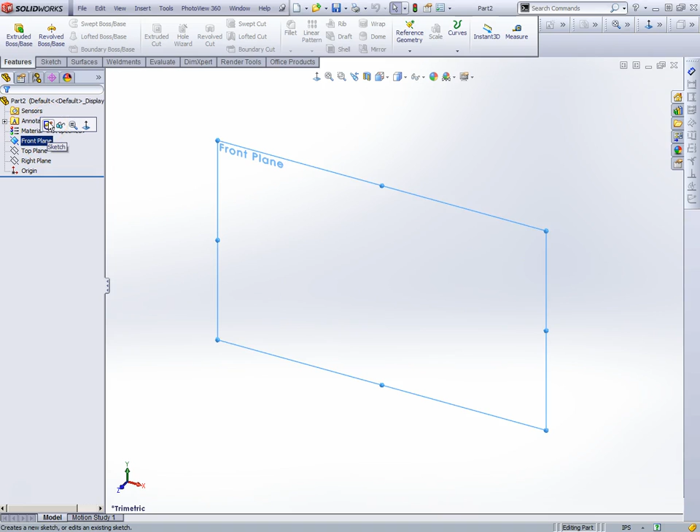And I'll go for a simple rectangle, middle here, pull it out. I'll make this 2 by 3. I just typed in a 2 and a 3 there. Hit enter, exit the sketch. Let's go ahead and extrude the boss. You guys have all done this a lot, so we're just kind of flipping through this here. I'll make that a 1/2 inch.

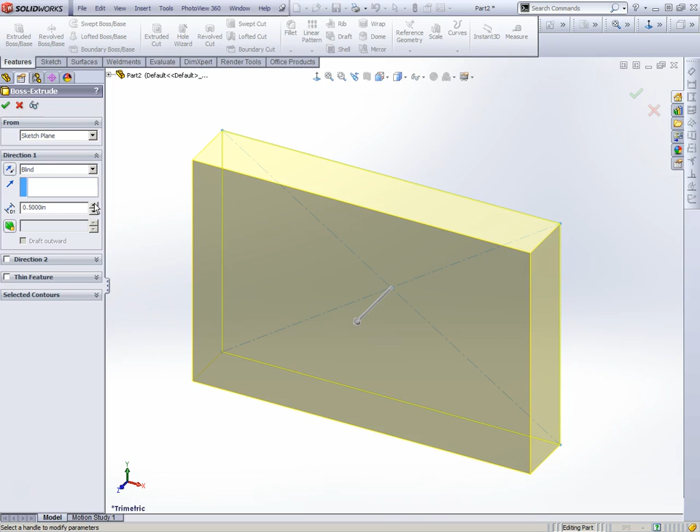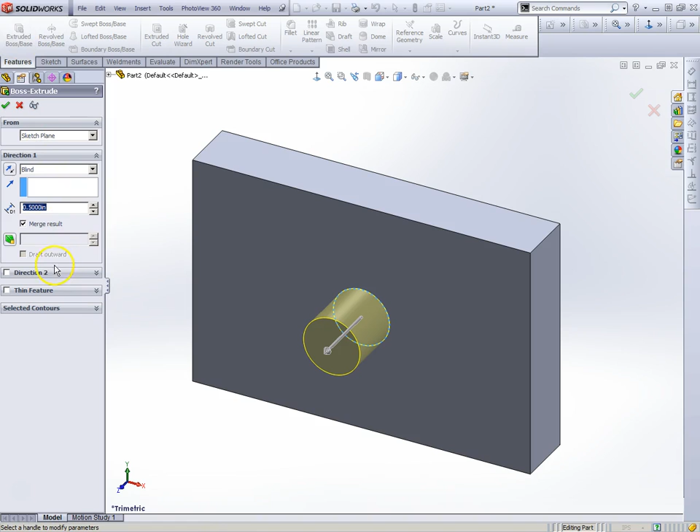And to make the part more interesting on the face here, I'm going to do another sketch. And we're going to do something simple like a motor shaft kind of a looking thing. I'm going to just type 0.500, enter. And as you might guess, I'm going to immediately go back and extrude that, and I'll leave it at a 1/2 inch. Kind of gives it some kind of a meaning to it.

And we're going to save that as, let's see, let's go to SolidWorks files here and find the ECM110 directory. And you can see I've got my fun stuff here, so we'll just go to the 2015-16 year, and I'll make up a new folder. And we're just going to call it build in space demo. Okay, so we're going to build in space demo here and save this off as, I will call it motor 1. And I'm just going to save that. Okay, so now I have a part.

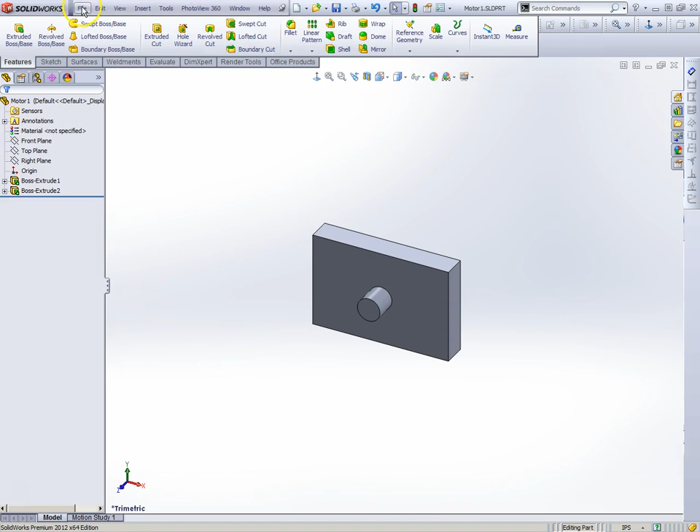And now we're going to be leaving the land of parts. We've been doing a lot of part stuff. So now we're going to go over to the land of new here and go to the land of assembly. Okay, so it's different in assembly because we are going to be kind of doing things that are like pieces of both, but you're going to have to be very careful as we move back and forth between layout and part and sketch. Okay, so what I'm going to do is I'm just going to go ahead and make this easy. The assembly is already knowing that I have one of these, but I'm just going to X out of that.

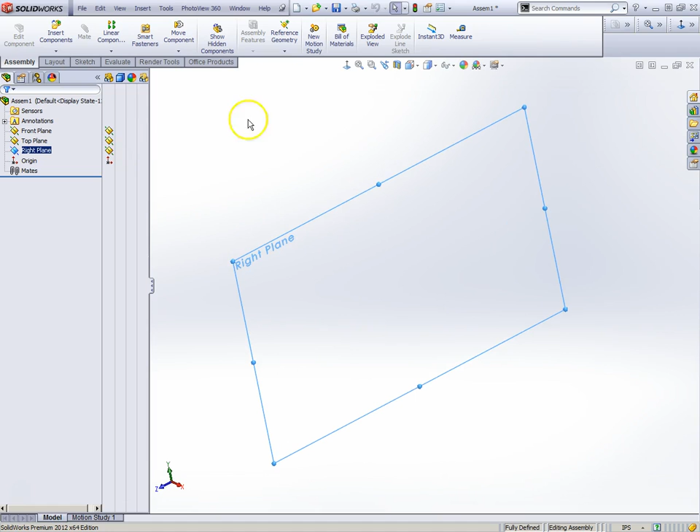And I'm going to go over these planes a little bit, and we're going to do this little thing right here. You see this little pull out here? That changes things because now I can turn all these things on, and I know they're all on, okay? And the advantage is that I can see these different planes. Now, if I go up to here and I hit View, and I say Planes, it's going to show me all of them. I believe I can toggle this off and just have the plane that's highlighted. Okay, so a lot of times people do this, they turn them all on, it says, I can't see all of them. Well, just go to View, hit Planes, and now all the planes are here.

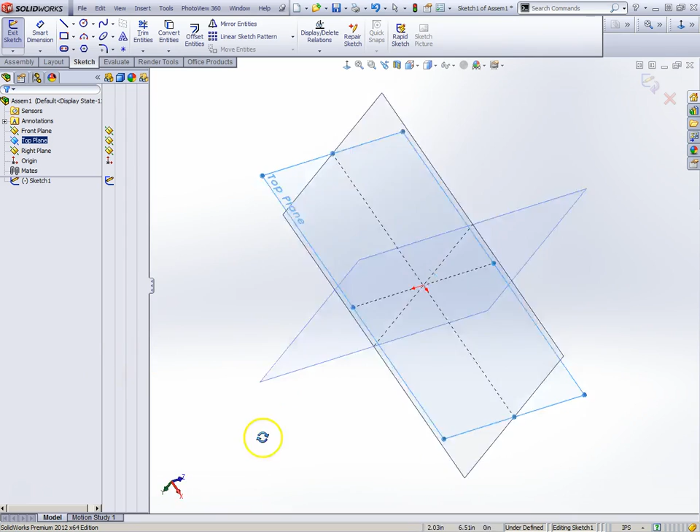Now, there's all kinds of ways that people come up with the version of how they want to do these. A lot of times I like to use the front and the right plane when I do this kind of stuff. So I just get used to having that kind of orientation. Kind of use the right plane as the end of my thing, and the front plane is sort of the silhouette outline of my thing. My top plane will be used for reference for doing various things later.

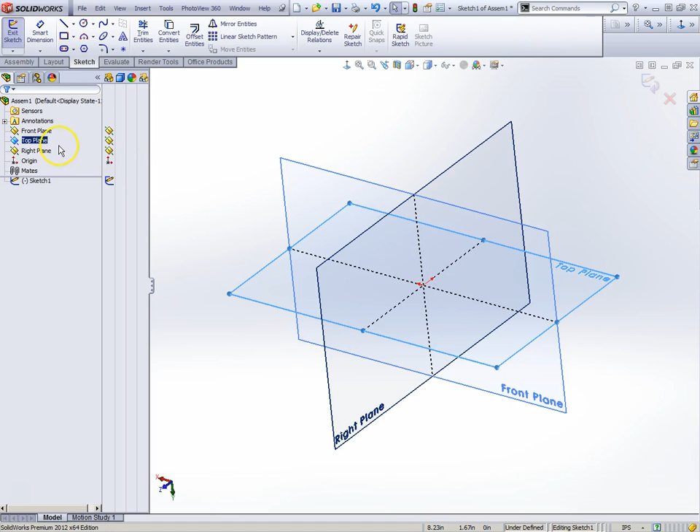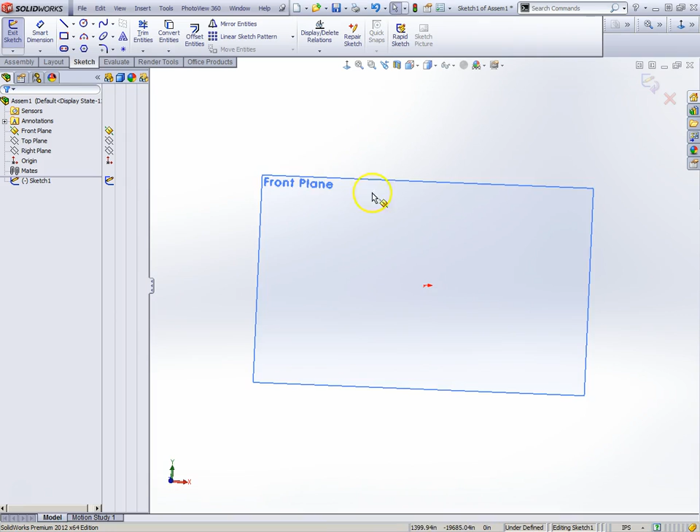But what we're going to start with is I have all these turned on right now. I'm just going to use the front plane as a base frame to work from. And so I'm going to turn off the other two here. And as you can see, I'm just down on my front plane. And I'll flip it around here because I'm going to try to get this in some kind of, hang on here, X, Y. Yeah, there's X, Y right there. So let's flip it around that way. Okay. So right now, X is to my right, Y is up and down.

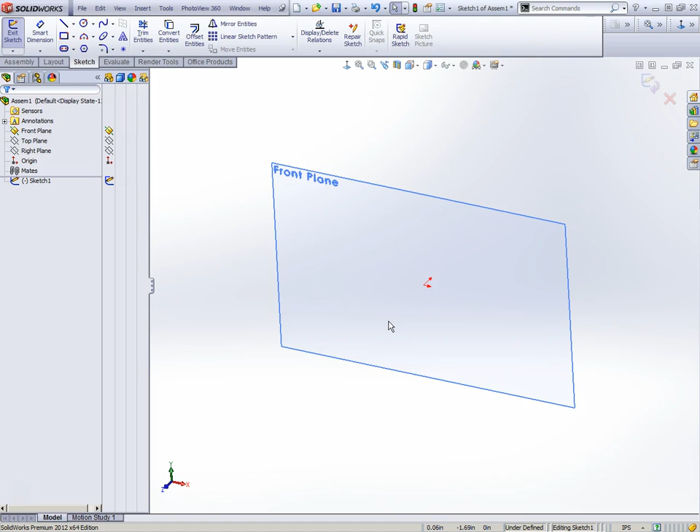It's not really important, but it's just handy if you like to play with X and Y. And so what I want to do is I need to add, I've got to create a space to start hanging things on. Okay. And so first I'm going to exit this sketch that got started there.

And right now I just have a front plane, and I'm going to go to reference geometry. And you see plane. And now it's going to ask me for a reference. So I'm going to go ahead and click the front plane here if it lets me click it. There you go. And I can now pull this out. Hang on. Oops. Let's do that one more time. I'm just going to click the front plane here.

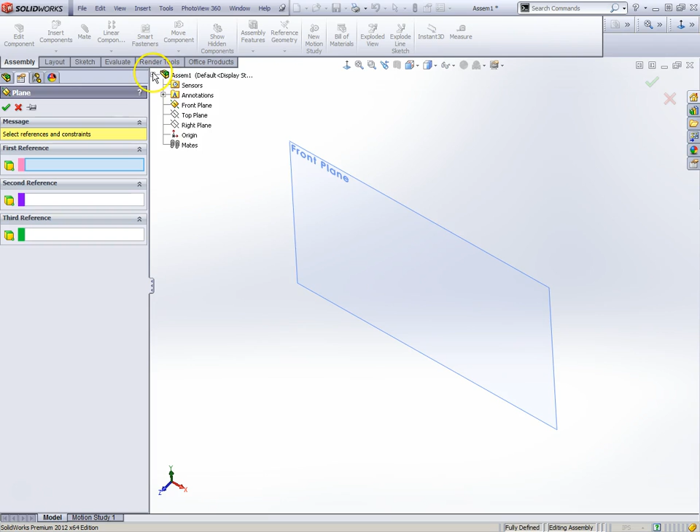And I'm going to say I want a plane. It's referencing the front plane, and I'm going to come out 2 inches. Okay. So now I'm out here 2 inches, and I can say, okay, I like that plane. And so now I have this plane. This is going to be the beginning of where I want to put something, where I want to start out with my first component in space.

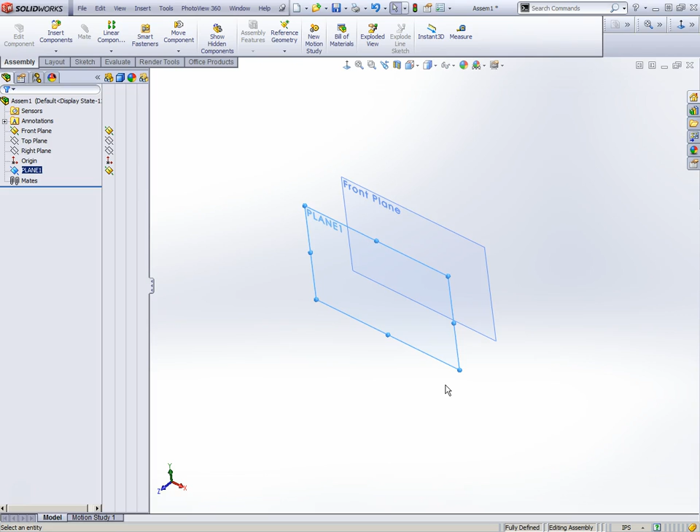Okay. I'm going to turn on the right plane here too, just so we have an idea where everything's going. So you can see I have the front plane, which is already there. I added my new plane, which is this one. And I'm going to just sit on top of this for a second, and you'll notice that if I hover over it, it'll let me change the name of that.

And so I'm going to call that the ear plane, no pun intended. I'll just go ahead and do it in uppers and lowers so it looks like the other labeling. And now you notice over here it says ear plane. Now the reason for that is I need to have some ideas of where I'm going to be putting stuff.

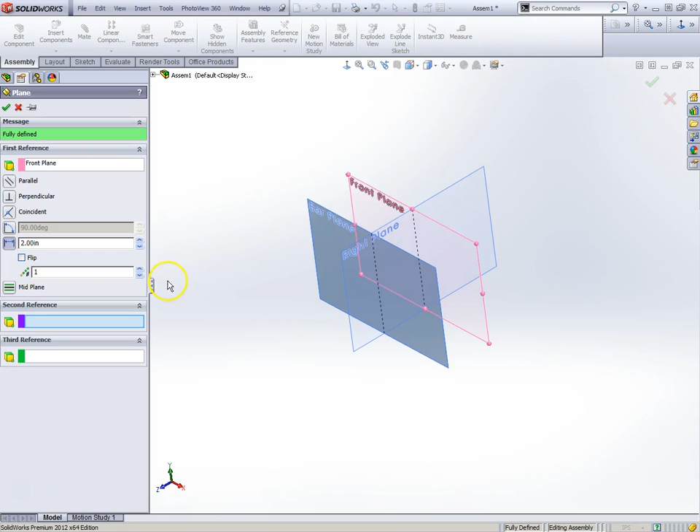So now I'm going to add another plane, same thing, just insert a plane. I'll still use the front plane as a reference, okay? And this one we're going to move out to 3 inches. And now I have a 3-inch plane. Now I'm going to label this one the leg plane. And so now I have the ear plane and the leg plane. I have control over turning these off and on, so I can cut my confusion levels down pretty quickly.

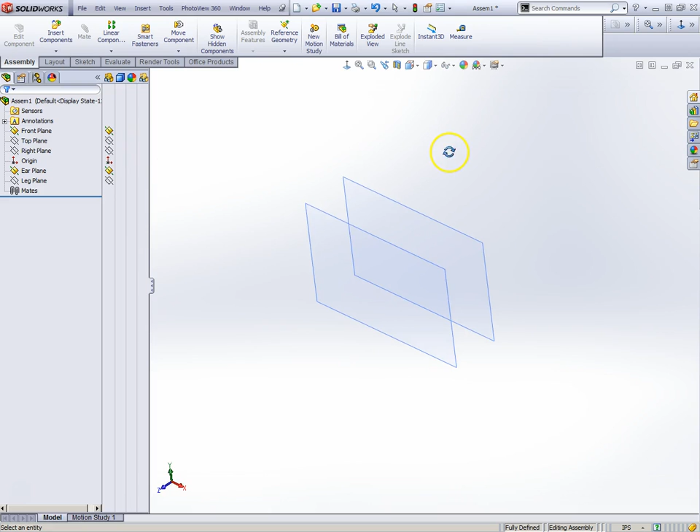I'm going to start by turning off the leg plane, and I'll turn off the right plane here too, so we just see our one plane. I'm going to leave the front plane in the background here. Now I'm going to go to insert up here, and it's going to say component. And remember the motor we just made? I'm going to say existing part. I only have one part in that directory, but I could have hundreds in there. And you'll notice it brought it over here.

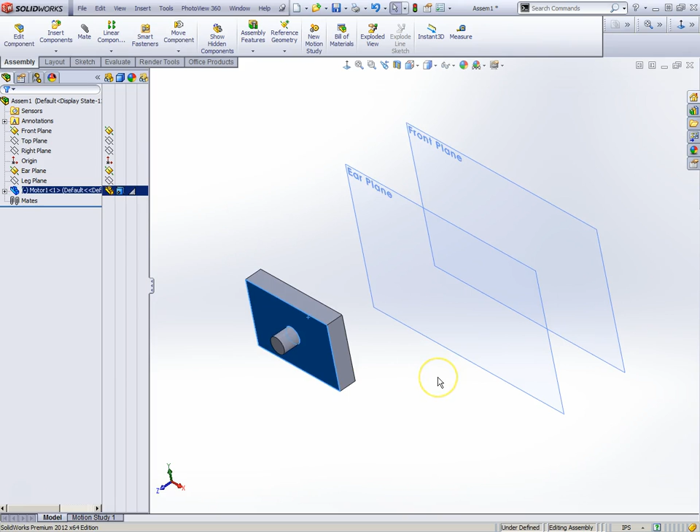We're going to click on this thing, then right click, and you see the word float? It's pretty important we click that, so now we can move this thing around. Otherwise it'll be fixed in space and it won't go anywhere. You don't do this too often, so we're going to go through this. You're used to doing mates between parts, but now we're going to do mates between planes. And that's a really big difference from what we've been doing.

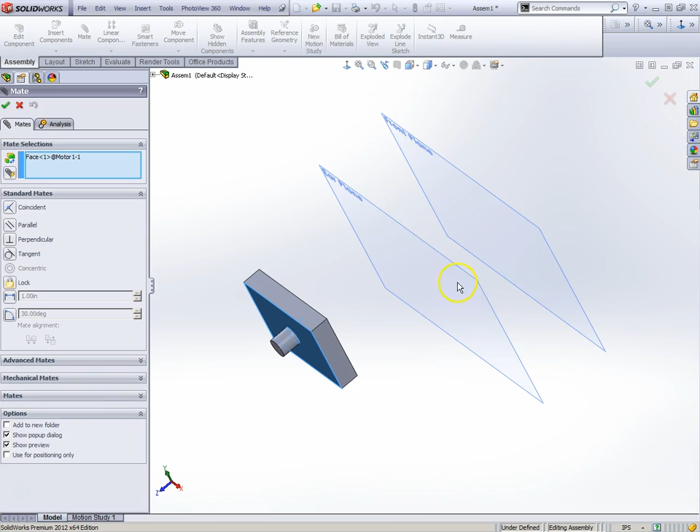And the reason for this is that we're trying to put stuff in space where we want it. I've already designated the ear plane as how many inches away from the front plane I want to be. So I'm just going to hit mate. Let me right click and clear whatever's in here. And we'll click the ear plane, and I'm going to click the back of the motor. Poof! Now it's on the ear plane, and that's pretty cool.

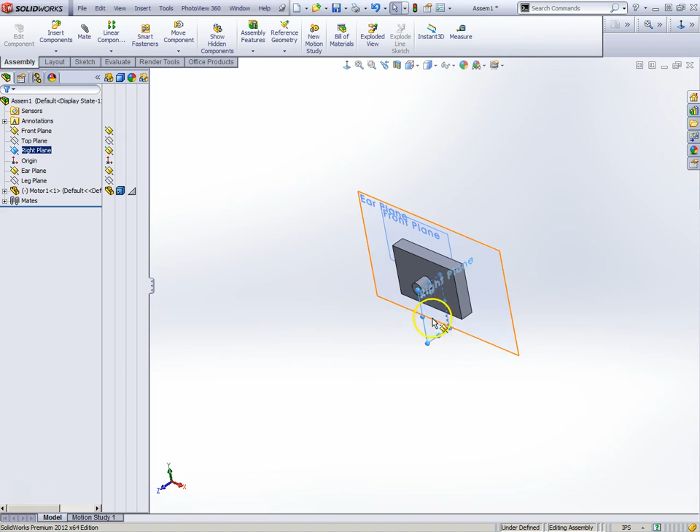But that's not doing us much good because you can see I can move it all over that plane. So just for another reference, let's get the right plane going. Okay, and there's the right plane hanging out. And I'll go ahead and move this part over here real quick.

And what I'm going to do is I'm going to do a mate here between the front of this motor. I don't think I got that. Hang on. If you don't see the part light up pretty well, just kind of zoom in a little bit. Make sure you get the plane you want. And we'll do the right plane. Okay. And notice I'm still going up and down, but I can't go left and right.

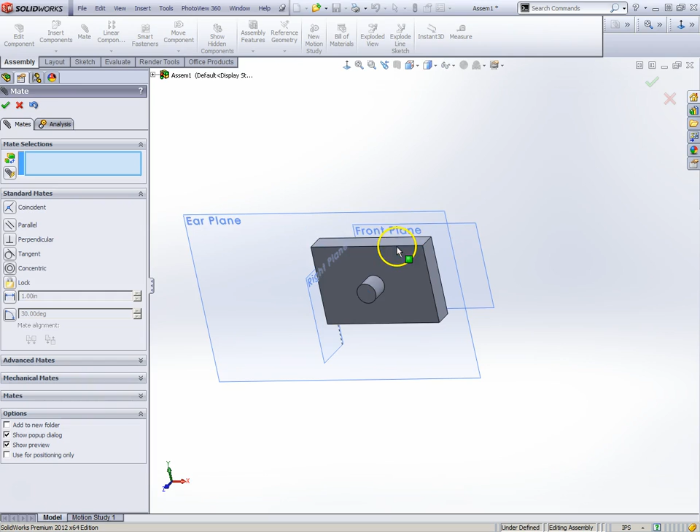So which would you think I would turn on next? How about the top plane? Let's turn that on. Leave all those guys on. And now I got the top plane here. And remember planes, once you click on them, you get these little blue dots. So if you want to, you can make them a little bit bigger to give yourself a better idea how they work.

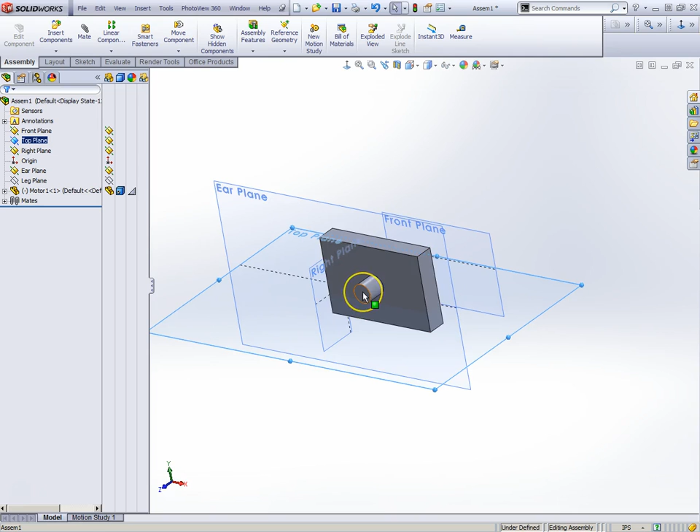And I'm going to say, this is going to be the shaft of my rotate-my-ears-around motor. So I'm going to put a mate on this, and I'm going to go from this plane here, the top plane, and I'm going to go underneath to the part and do that. And you'll notice it's already going up. And I'm going to go over here to the distance, and I'm going to put that at 3 inches above.

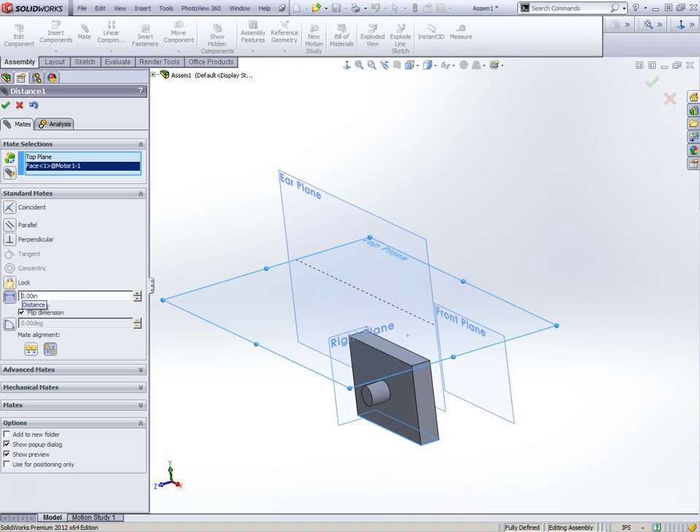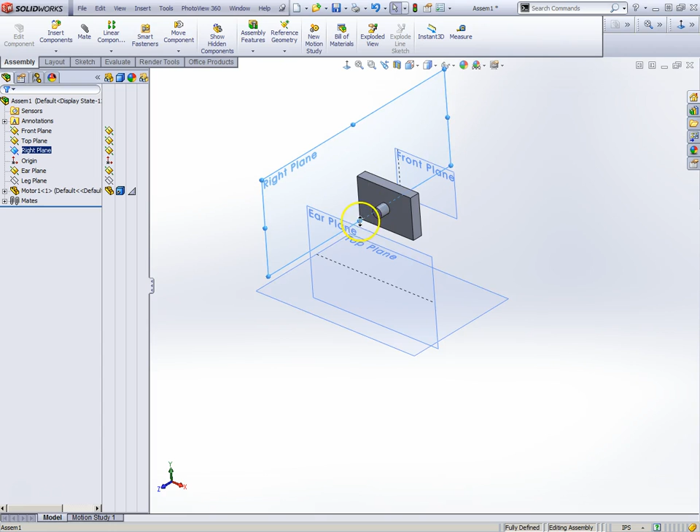Okay, now if you notice it went the wrong way, all I got to do is hit the flip dimension here. You'll see it goes up. So I just moved this thing around, and it's all based on planes. So I'm going to make these planes a little bigger now so you can see this a little more clearly. Because what we did is we said we want the part on our ear plane, okay? And you'll notice that it's stuck to the ear plane.

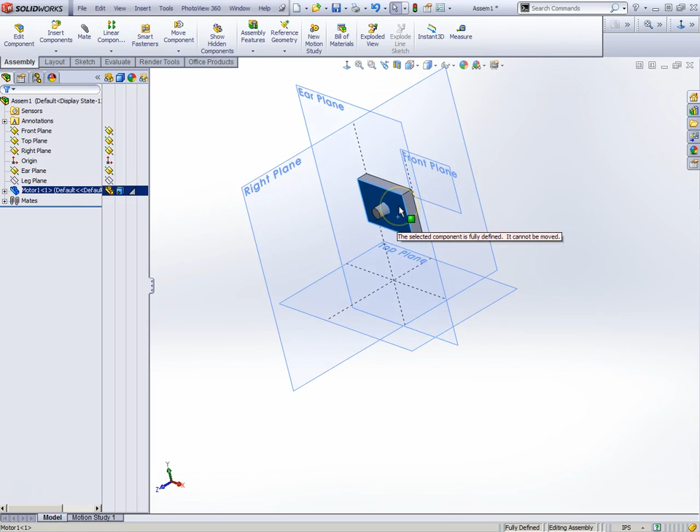Then we referenced this edge, the other side of this motor, to the right plane, which is a fixed plane in space. And we also referenced it to the top plane, and now I can't move it. It says the component is fully defined, it cannot be moved. And that's where you want to start out, because that now anchors a lot of the work you're about to do. You're going to be doing a lot of other things here.

And so I'm just going to stretch these planes out once more. And notice I left that front plane just kind of drifting in the background. We'll just let that sit back there and not worry about it. And remember I had another plane called the leg plane? Well, let's go ahead and turn that one on. So here's the leg plane. I can turn that one on now. Okay.

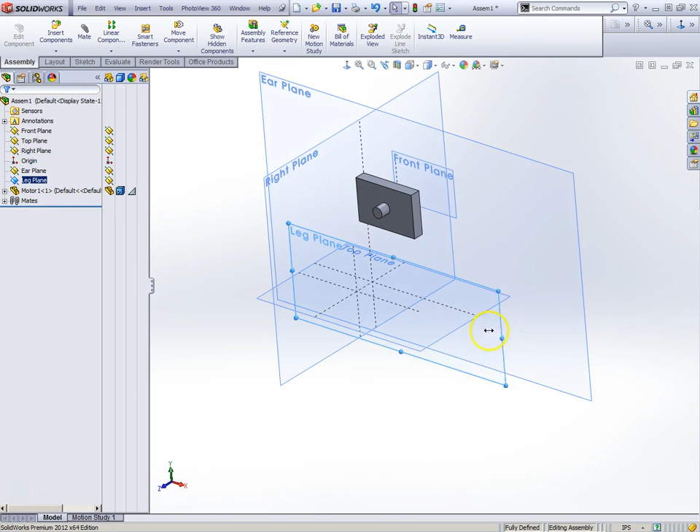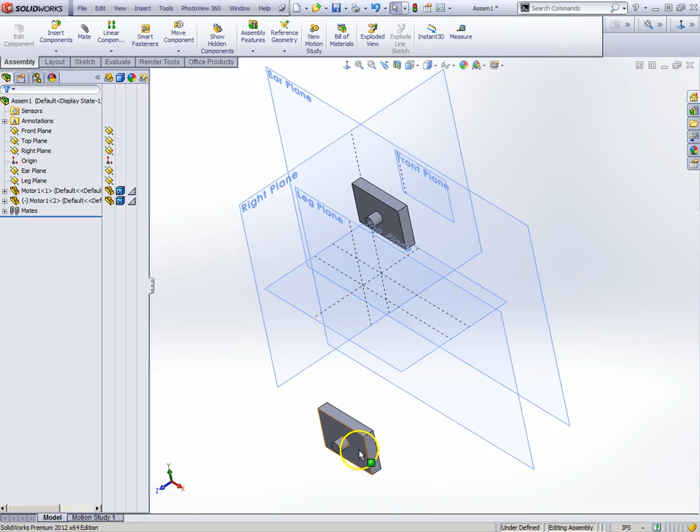And we're going to put a motor on that one. And so I have to do what? Insert, component. Have I already made this component? Yes, existing part. Now click that, and ta-da, it's over here. Now, if I click on the part and I right-click it, it says I can fix it. So it means right now it is a floating part, which is great. You always have to double check that, because if all of a sudden you can't move something, it probably means it has already been anchored on you.

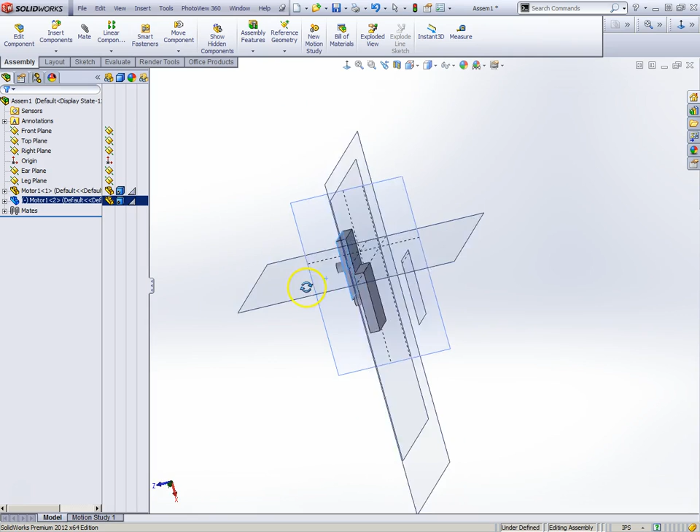I'm looking at the planes here, and I'm thinking that ear plane is a little further away from the middle than I want. So let's fix that first. When I look at the top here, you see that ear, here's the middle, which is going to be the middle of our system. And I put this over here, and I don't have a lot of distance between the ear plane and the leg plane. So I'm going to go back to the ear plane.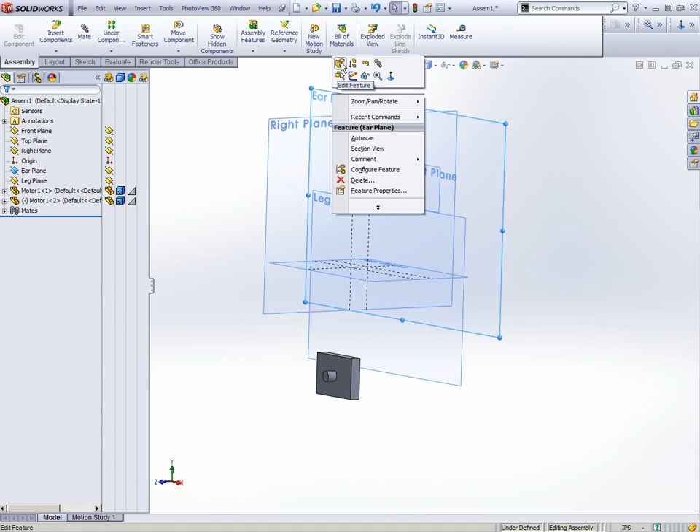And if I right click, you'll notice it lets me edit the feature. Okay? Planes are just like objects. You can handle them the same way. And notice what I'm going to do here. I want that a little closer, so I'm going to make it 1.5 inches. And ta-da! Now I got more space between them. So you can click on planes, and you can edit their features all kinds of ways.

You get in trouble if you start playing with planes after they've been used in a build. In other words, as you keep building the part, you'll have a lot of problems on a rebuild. So pay attention to getting your planes where you want them to start out, because later on they can be a bit problematic to fix.

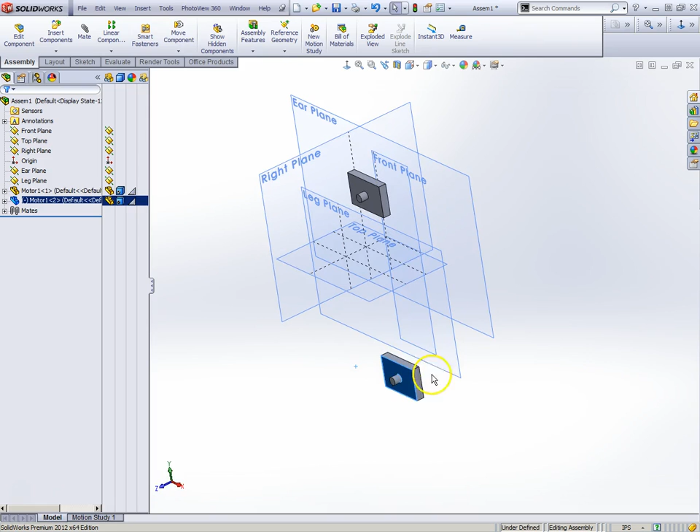Not unfixable, but definitely you will be breaking down a lot of stuff, going backward and then resetting and then putting a lot of parts back. Okay, so let's get back to our motor I got floating here. Okay, and it's just floating. So first thing I'm going to do is what? I want to put it on, this is going to be my leg motor.

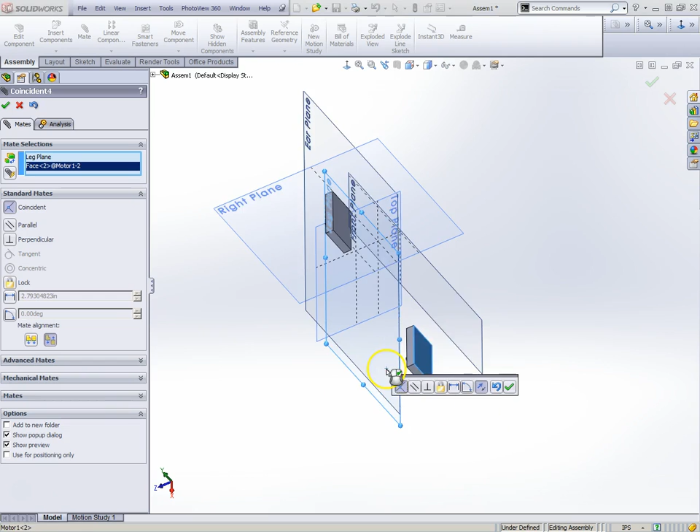So I'm going to ask for mates. And notice it's picked something, and that's always the first thing I do. Go over here to the mate and just say clear selections. And I'm going to go to the leg plane. Okay, and I just highlight it there. It says leg plane. And what do you think I'm going to click? Back of the motor. Poof. Now it's on the leg plane. But notice that it can move anywhere it wants on the leg plane, right?

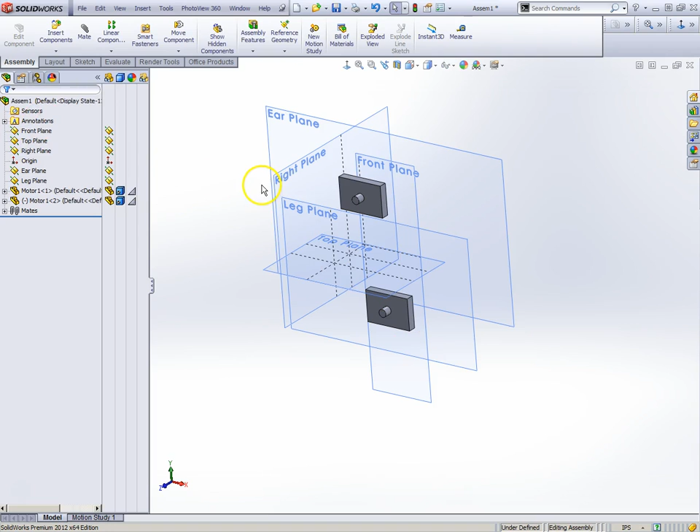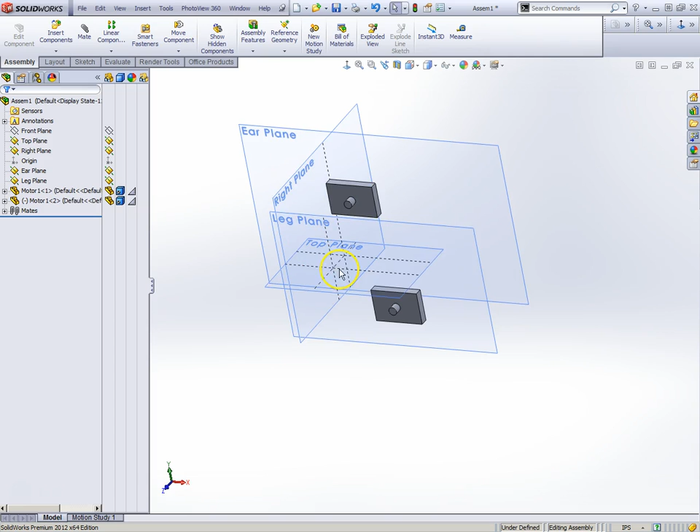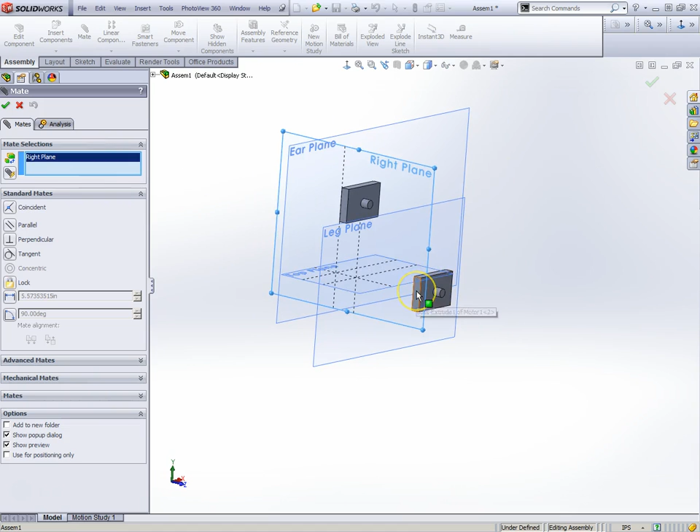So what I'm going to do is I'm going to go ahead and anchor this thing in space so it doesn't drift around. And I'm going to use the mate. And I'm going to pick the right plane so I have a common reference. Oops, it's got too many things that I already had picked, so just clear them out, pick the right plane. And now I'm going to click that edge of that motor box. And I'm going to say, since I'm designing this thing, I would like to have that motor 6 inches from the front. And I could hit fine with that.

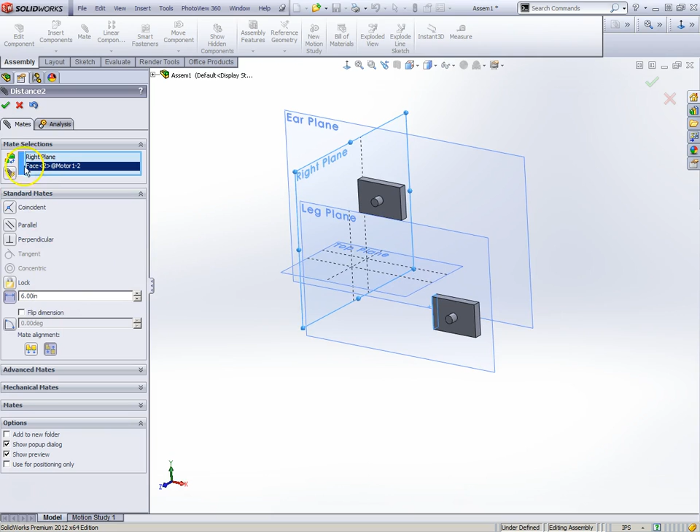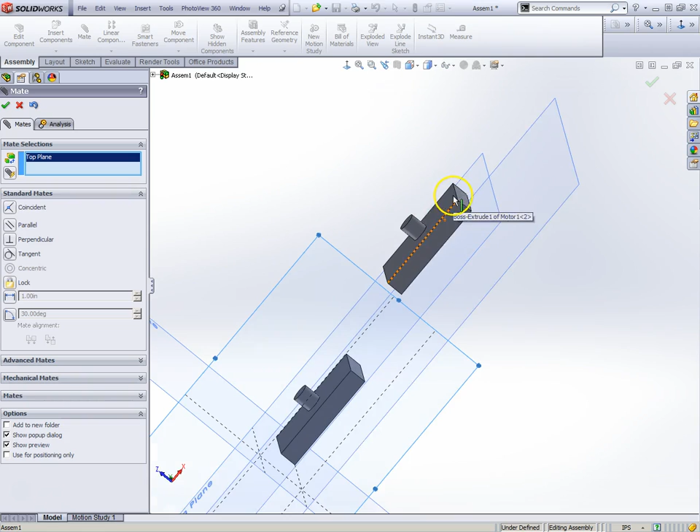And now there's one more problem. I could still go up and down. I could register this all kinds of ways. I can come off the other motor, or I can come off the top plane. Let's use the top plane for right now. Pick the top plane. Pick the bottom of the motor, and it's having a little bit of trouble, so just zoom in. There you go. Got the face of that. I'm already working on this part, so I gotta hit that. It's going the wrong direction, so I hit flip dimension. Up I go. I'll just set it up to about 1 inch here. I'll just type it in 1.0.

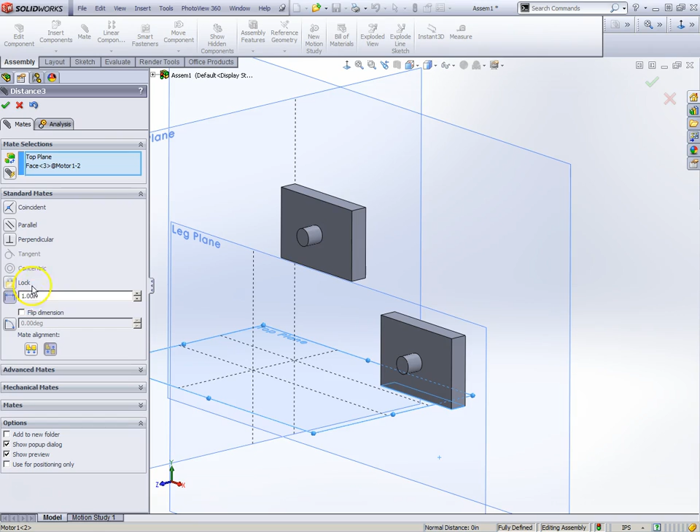And if we try to move the part, what do you think is going to happen? Nothing. It says the selected component is fully defined and it cannot be moved. Now notice how these parts are hanging in space right now. They are well defined. I can not move either of them. They're all set up to where I want them to be. And since I have them where I want them, we need to create a frame. I want to hold these together. Obviously this is neat that they're all locked in my SolidWorks model, but I need the parts to hold these things in place. And now we're going to hit a whole bunch of new stuff. So let's just get ready to do that.

All right, so what we have to think about is you're used to making parts by saying new. And your part is just built in space, and you don't really know much about it other than the fact that it's been built in some kind of space. You don't know where it's at. When we want to make parts that are part of an assembly build, then we have to do what's called an insert new component.

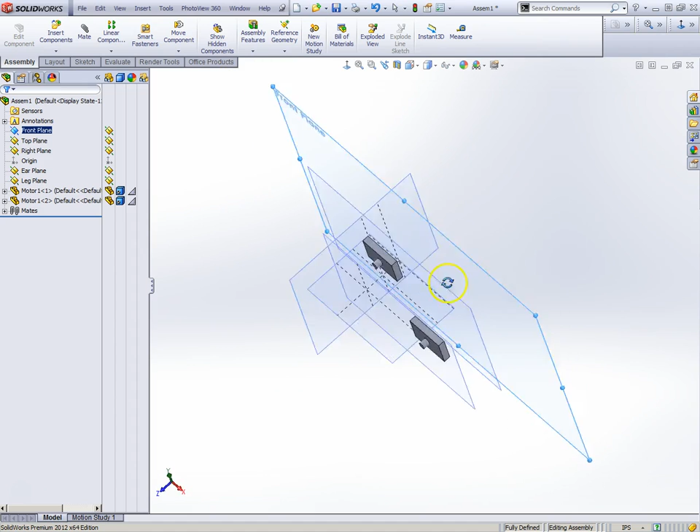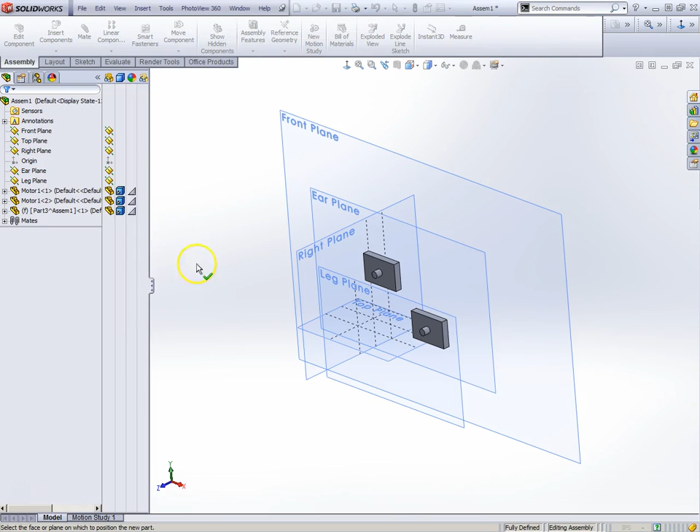Now what I'm going to do is I'm going to turn on that front plane. Because for me, this is where I want to put the center of my system. In other words, whatever I'm building, that's where I really want to start it out. You notice how everything's offset from that right now. I've kind of been setting that up for you. And now instead of inserting a component that exists, remember I'm in an assembly right now. See the ASSEM1 up there? I'm going to insert a new part. Now that sounds weird because I'm in an assembly, and normally we always do that in parts.

Okay, so I have to pick a place to do this. I'll pick the front plane. What I'm going to do is start out with this. Notice it's already in sketch mode because I said I want to put a new part in. All I had to do is click the plane that I wanted to put it on. Okay, now let me exit and do that one more time so you can see that.

Okay, and what we're going to do is I'm going to go back. I can't. That's right, I can't go back on that one. Let me see if I can just delete that part real quick. Yeah, okay, got it.

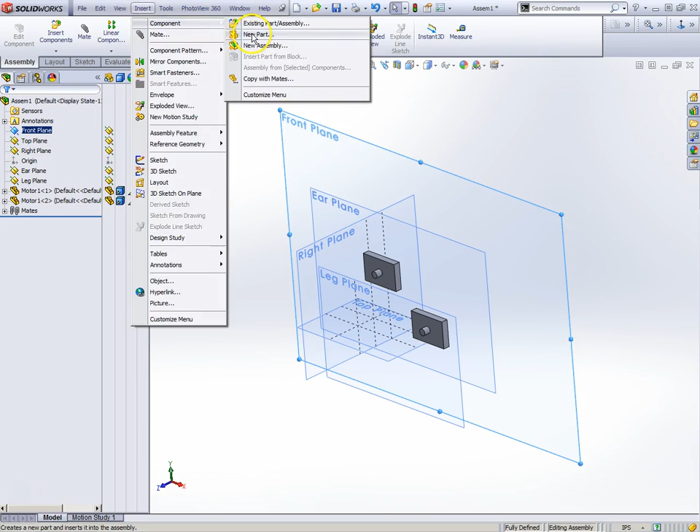So I'm going to do that one more time. I'm going to say I want to insert a component as a new part. Now, one of the trickier things with SolidWorks is sometimes it works in verb mode, which means you can kind of preset stuff. So I'm going to hit the front plane, click it first, and now I'm going to say insert component, new. And I guess it's still not doing it. So I'm going to just click the front plane here. And it now is on the front plane, okay?

And I'm going to be doing a sketch there. What I'm going to do first is, just to show you that this is real, I'm going to go ahead and hit a circle here and draw a circle. You'll notice it's drawing it on the front plane. We're going to just do an undo on that, but I just want to let you know that yes, we can draw right on this plane here. We just picked it. But what we're going to be doing is something called convert.

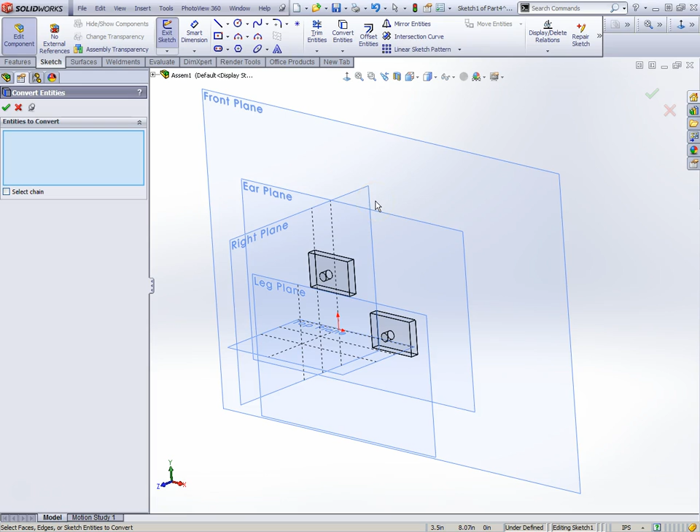And the reason why we want to use convert is convert saves us from doing a lot of pencil and paper numbers trying to work out where things are. So I'm going to do convert entities here, and you'll notice it says, what entities do you want to convert? Well, what we're trying to do is get things from other places onto our sketch that we can use.

So notice what I'm going to do. I'm going to hit this edge, this edge, this edge, and this edge. And if I hit the green button, the check mark, notice it landed on my sketch plane. I'm going to go ahead and hit the circle too while I'm at it. And every time I hit green, or the check mark, it's going to move those. So what I'm basically doing is putting on my

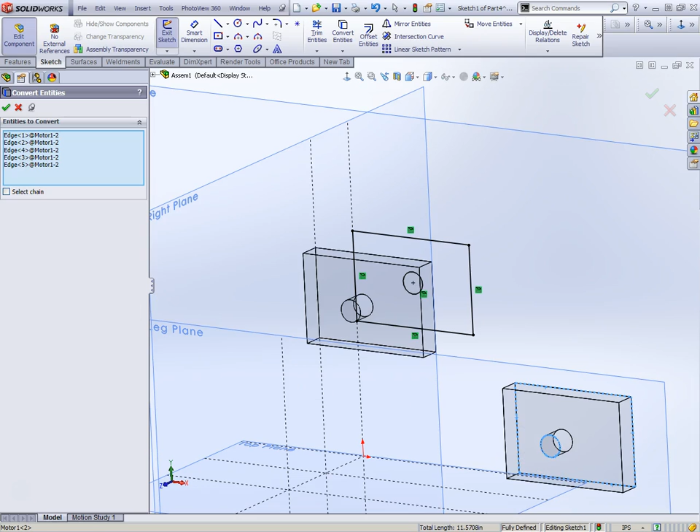background sketch, which is going to be my frame. I can click all these guys, and you'll notice they all got transferred to there. And I didn't do any math. I didn't say how far apart is that or anything. I have it right now.

And I want you to be very careful and note that this big button up here says edit component. That means you are actively making a part right now, okay? And you got to remember that you've kind of gone out of the assembly a little bit, but you're not too far away from it. You're editing a component right in the assembly, okay?

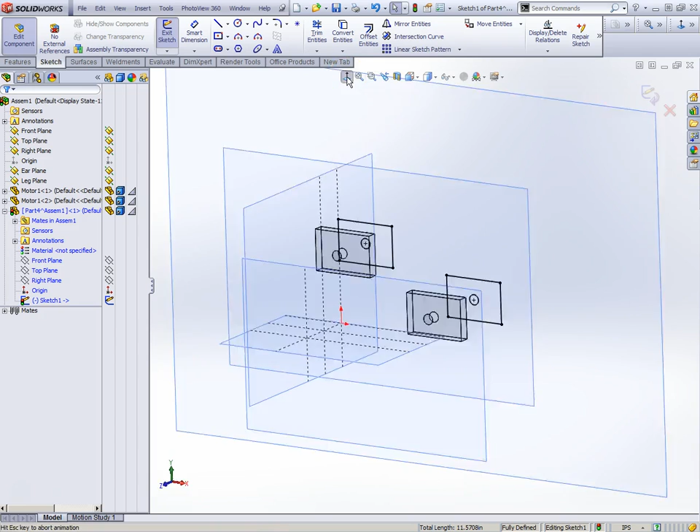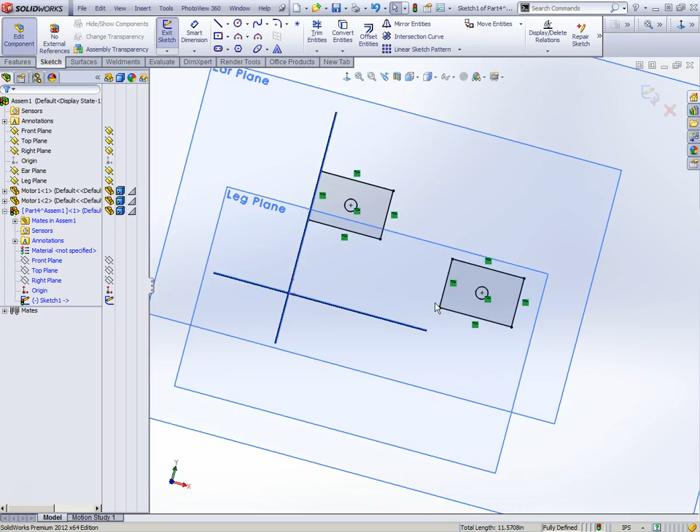Now what we're going to do is use our little normal to here, and you'll see that we're looking at our system. Now, if you didn't do that little XY thing I showed you earlier, your drawing may be upside down right now, okay? So what I recommend is just know this: if I hit the Alt key and the left arrow or the right arrow, notice I can rotate it. So if you're upside down, you can just do this and you'll all be happy again. But if you do take the time to make sure that when you start your drawing, X and Y is like you're used to seeing it, everything will come out fine right away.

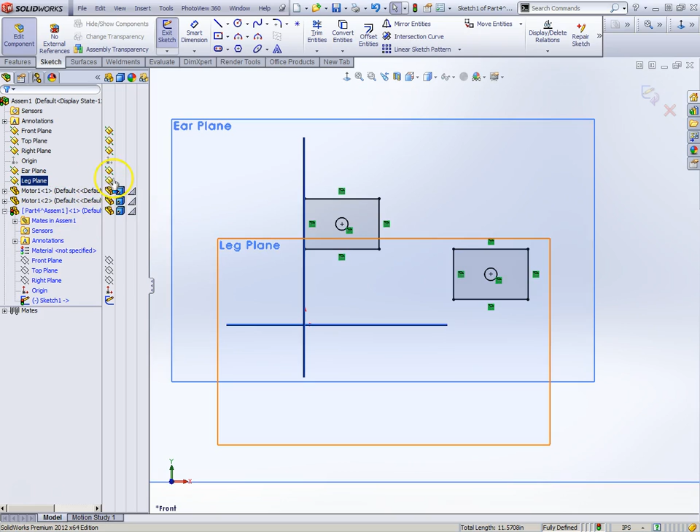Now, I'm still in sketch mode here, okay? Tell you what I'm going to do. I'm going to turn off the leg plane here because it's not part of what I want to do right now. And I'm even going to turn off the ear plane. I don't want to do that right now.

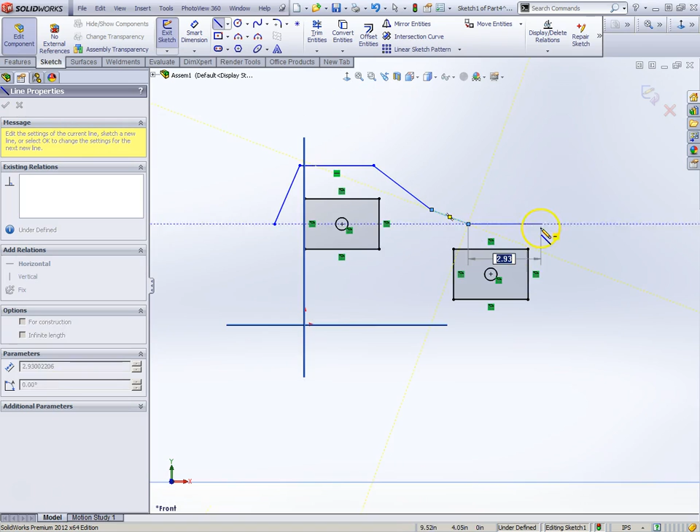But what I can do now is I can start another sketch. I mean, I can just draw. I'm on a sketch, I'm going to draw some lines right now. And I'm going to pretend that I'm drawing some kind of framework that I probably think the bunny rabbit frame in this case is going to need. So I'm just kind of going along here.